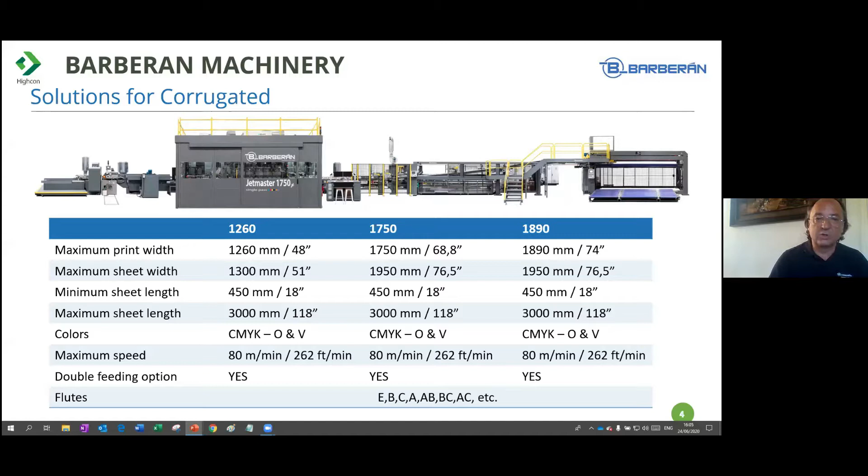Our strengths are based on 5 points, which are the soul of Barberan. One of them is the freedom for the customer to choose the ink supplier. We have 5 or 6, depending on the market, ink suppliers that can supply ink for our machines and can even adapt the ink for your needs.

This is something our good partners are doing, and we are lucky because we count with 5 of them, including 3 of the best-selling and biggest ink companies in the world, which are Toyo, Sakata INX, and Kao Chimigraf.

Also, we have another point, which is the real variable data platform. It's something we created this year. Our machines were capable of printing variable data since 2 years ago, but customers weren't comfortable with this feature. So we created a platform where we create the job and prepare the samples for the customer, so they don't need software engineers or electronic engineers to understand how to create that job.

Another point is the production inspection and correction module. That module is not a toy - it's not just a camera that looks at the image and reports errors to the operator. This module is linked with the GIS5 software, and it corrects by itself the alignment and problems of different tonality between print heads and so on automatically, making it a really useful tool.

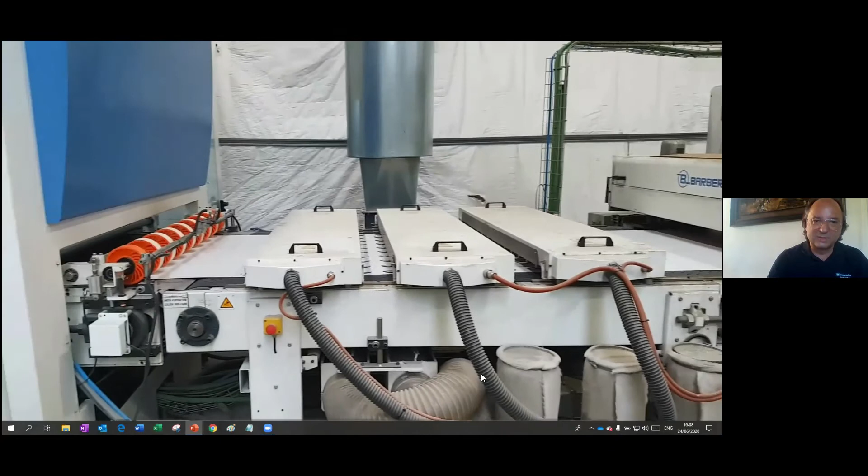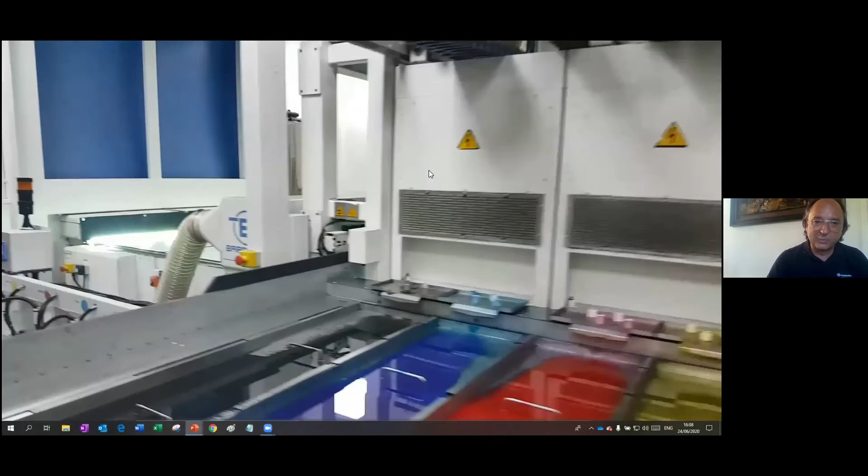So here you can see how we did the samples in the Smurfit Kappa facilities. This is not a new machine - I wanted to show this machine because it's from 2013. It was, I think, the second machine we built. It was done for Smurfit Kappa, it has the color of Smurfit Kappa, not our color, and it's still running like the first day.

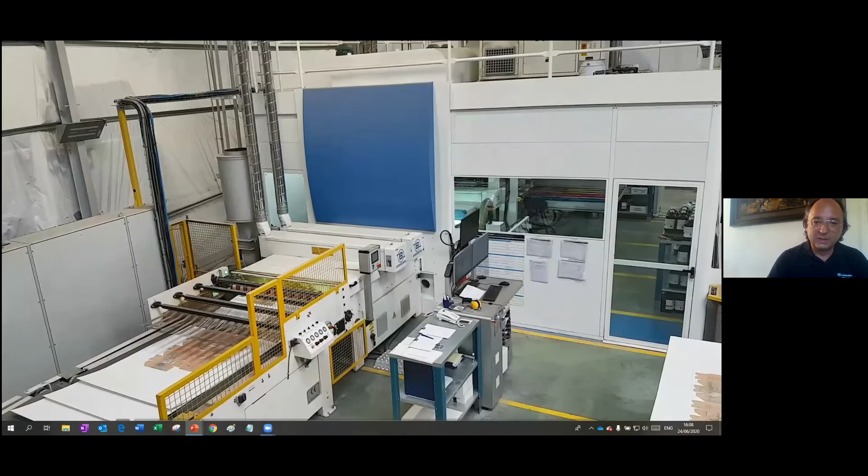We did a maintenance upgrade, I think it was 2 years ago, to keep it updated, and it's still printing like the first day. During the upgrade we had to replace only 30 print heads - from 2013, that's something we have to put on the Guinness record, okay.

So when we received the samples that were delivered to Castelldefels, due to the pandemic we couldn't send them by plane to Czech Republic, so we sent them by truck. It took almost 2 days to arrive from Barcelona to Castelldefels, to Czech Republic, because they had many stops due to the pandemic, isn't it?

So now is your time, Jaron. Okay, here you are.

So we all know today that pre-press is 100% done digitally, and we see that digital printing is rising up rapidly and growing fast every year. At Highcon, we define the finishing area as a place that also needs to move into digital, and this is where we've been standing for more than 10 years.

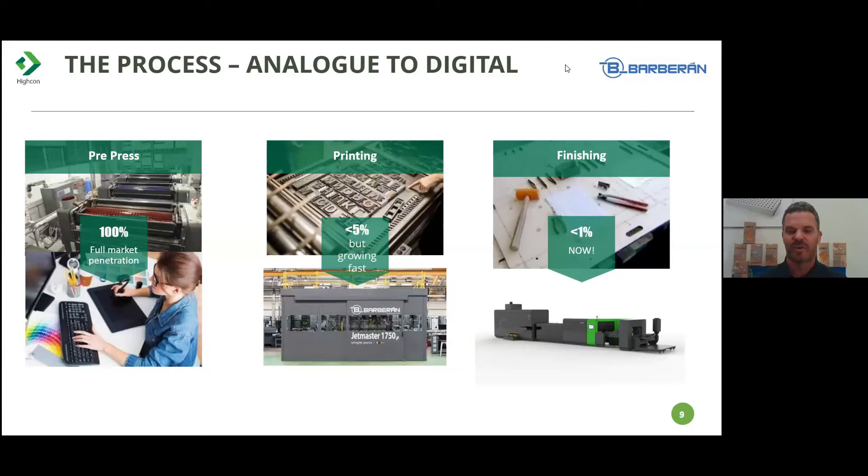Go on, please, Sheila.

So today we have quite a few machines spread all over the globe for commercial printers, folding carton companies, and corrugated companies as well. Some of our customers have multi-sites, and we see 15% of our customers already putting on repeat orders, meaning that people like what we do.

Going into the technology of the platform itself, if we look inside the machine, we pass the sheets landscape through a registration table that takes care of mechanical and optical registration. Then the sheets move into the first station, not like analog machines that have everything in one pass. We do it in a single pass, where we divide the crease lines and cutting lines into two separate areas.

The first one, for creasing, is what we call DART, digital adhesive rule technology. This is where you see the movie on the right side showing how it's actually made on the machine itself. We write the polymer, like a 3D printing paste, and then cure it with a UV lamp.

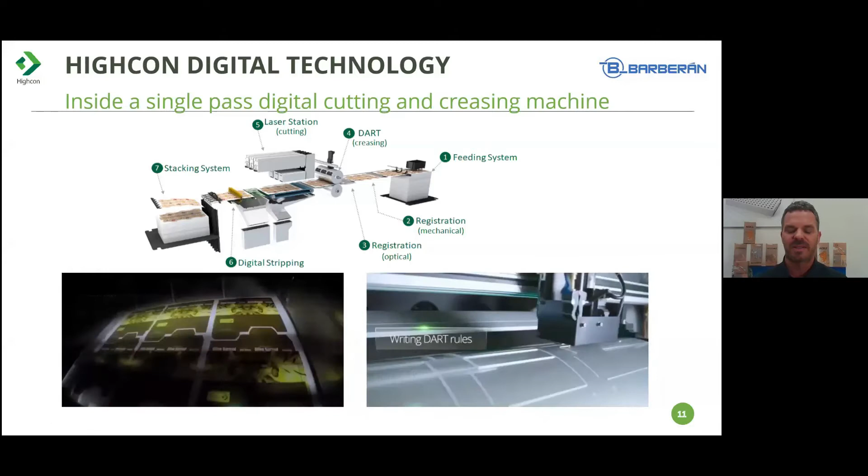Then the sheets pass through the second station, an array of 3 powerful lasers working in parallel with a sophisticated algorithm we created, and continue to station number 6, the integrated stripping unit, which doesn't affect any setup or speed, and of course doesn't cost any additional money for this. So this is the main platform of how our machinery works.

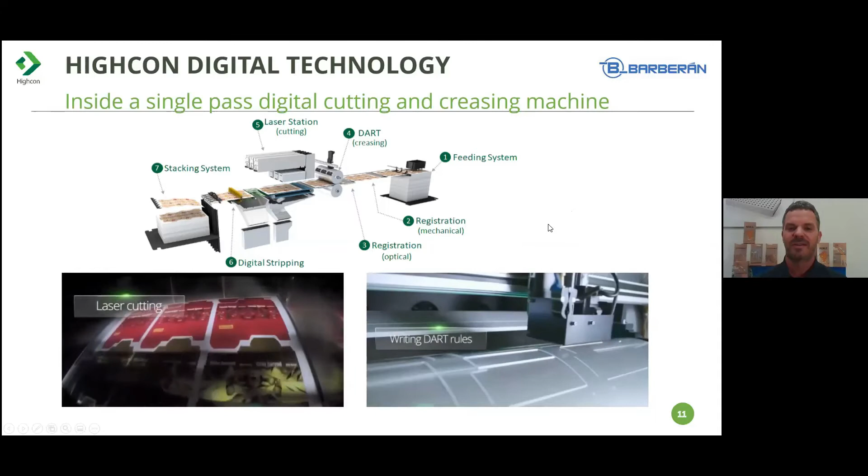For corrugated products, we can offer today 2 machines. The first is the Highcon Euclid 5C, which can run up to 2,250 sheets per hour, supports up to B flute, and is very good for short runs. For companies dealing with web-to-pack, for example, it's very suitable for them.

The other machine is the Highcon Beam 2C, offered in two types: one pallet-based, and the second a non-stop configuration. This machine was supposed to be presented for the first time at Drupa and be the highlight of our show. Drupa was actually supposed to be happening as we speak, but unfortunately we're all sitting at home watching webinars instead. So that's the machine, and of course all available, but at the moment you can just see them remotely.

Sorry, that machine was going to use a bottom feeder, isn't it? Yes, a bottom feeder and a non-stop stacker as well, like what exists in the market. Yes.

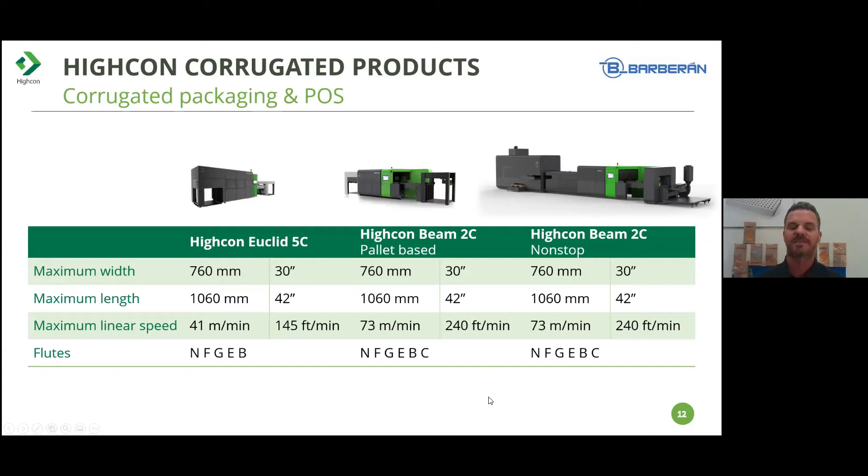Looking at the Highcon benefits, we identified 5 major benefits we want to highlight. First is speed to market, since everything is done in-house. You don't need any additional company to bring your product into your facility. We deal with all the short runs that are becoming more and more common today.

By doing that, we improve the process inside the factory. We can free the analog machines to do what they do best without stopping all the time for short runs. You don't need to wait for dies to come from another place. Another rising segment is online, which we see more and more companies using. It's very good, as I mentioned, for web-to-pack or e-commerce, for example.

And of course, very important to remember sustainability. That's a very important thing that Highcon can provide a lot of benefit for. For example, the BCT, the box compression test. If you see the box on the bottom, we cut many B-flute boards, all the same, but only the two marked ones are cut by the Highcon machine, and all the others were cut conventionally. You can see how they crash and lose their strength. So what we allow you to do is use a thinner substrate while maintaining the structural strength of the board itself.

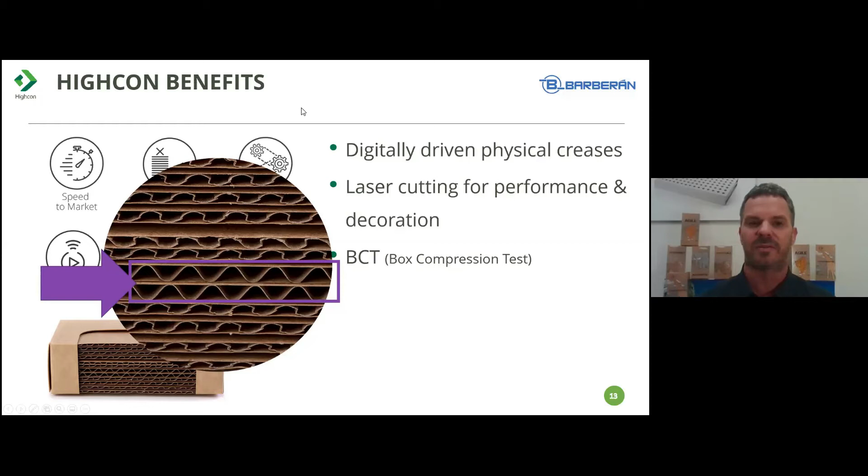And Eladio, I believe in digital printing it's about the same. In digital printing, we have exactly the same result. We've seen that our customers can reduce the quantity of paper due to our technology, which does not crease the board, so we keep the compressive strength completely intact. I have to add something more: it seems the UV inks also help increase the compressive strength of the boxes.

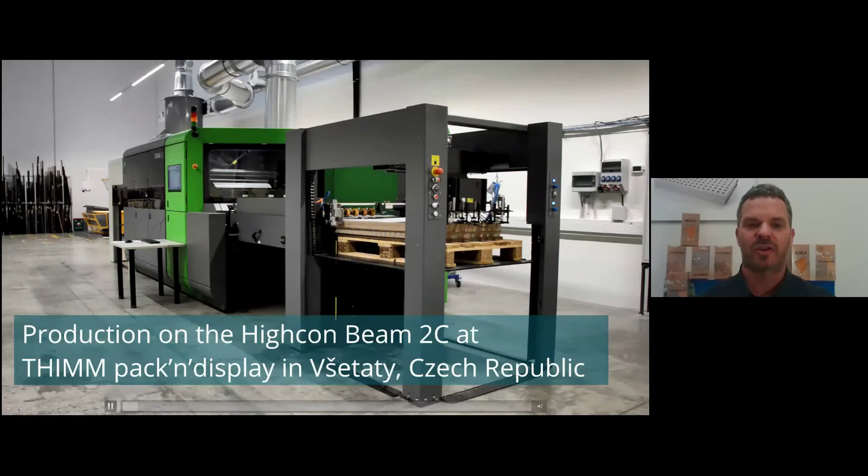Perfect. So now we're going to see those same boxes being produced on the Highcon, right? Yep, exactly. This movie was filmed at THIMM in the Czech Republic, one of our Highcon customers that owns the Beam 2C, the pallet-based platform.

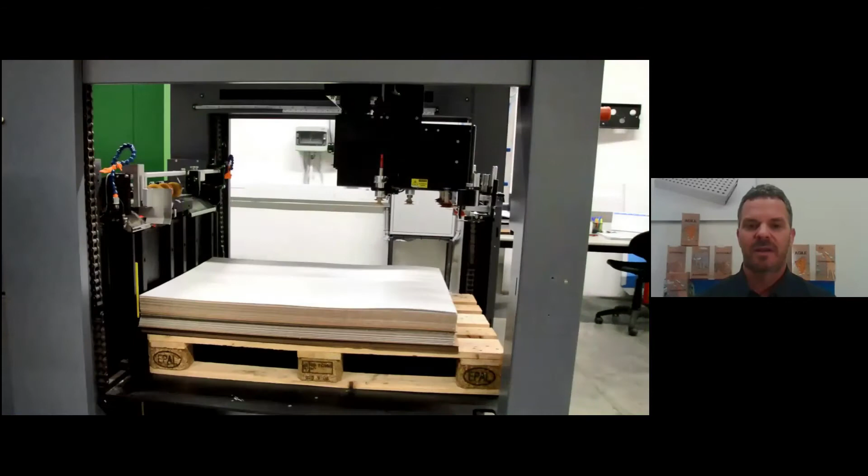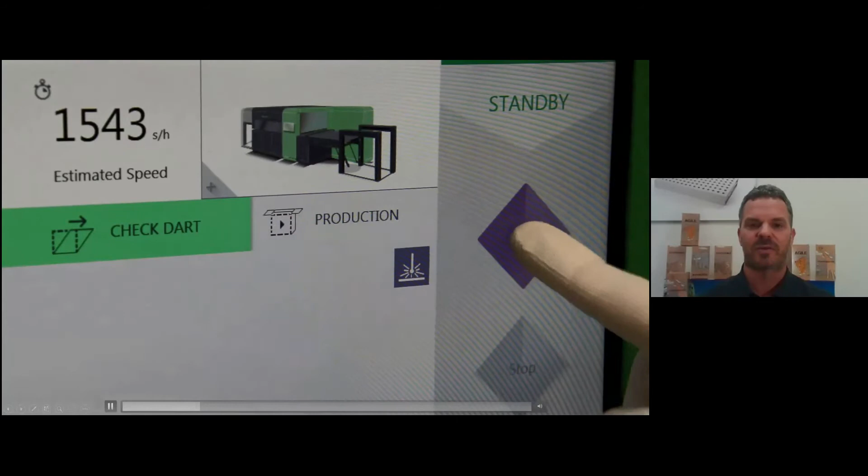So as you see, they will be running the sheets that came from Barberan, from Smurfit Kappa. We run them through the machine. You can see it's running at a bit more than 1,500 sheets per hour in this case, printed side down, like in the conventional industry. This is how we reproduce the sheets for the corrugated market.

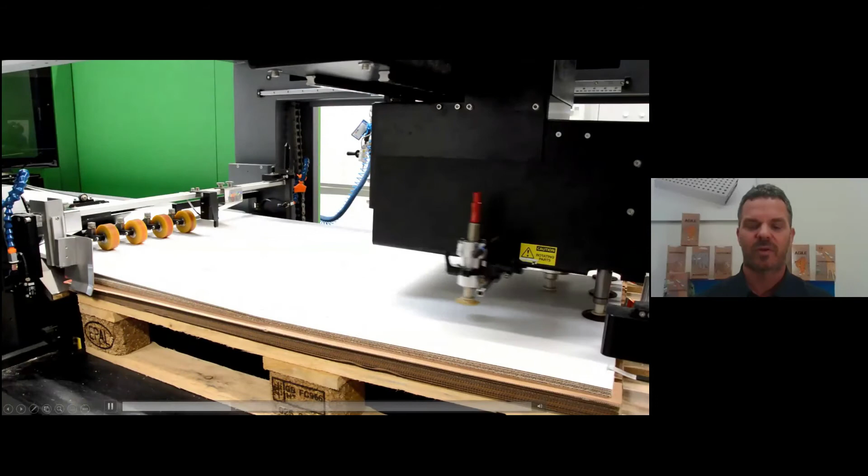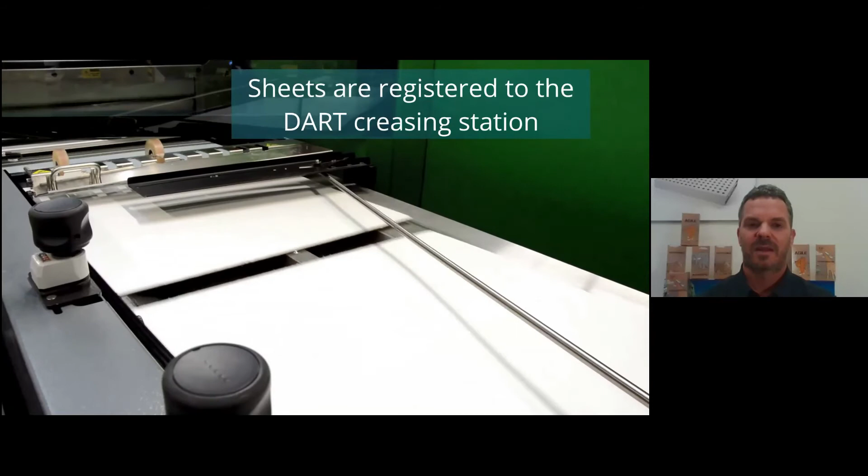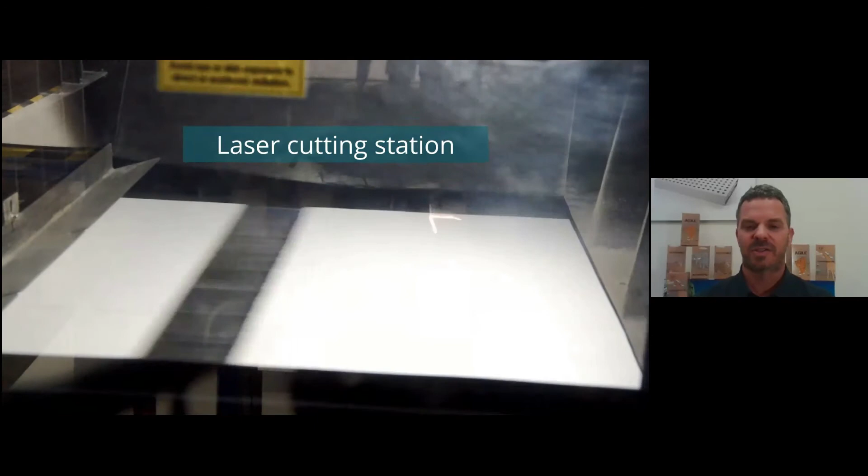Running through the DART station, the creasing station, and going into the cutting chamber where all the very fast cutting is happening, and into the stripping station, which is the last one, when all the small particles are falling apart.

So you don't need an extra tool for the stripping? Yeah, as I mentioned, it's an integrated stripping tool. You don't need to waste any time, and it doesn't affect any speed.

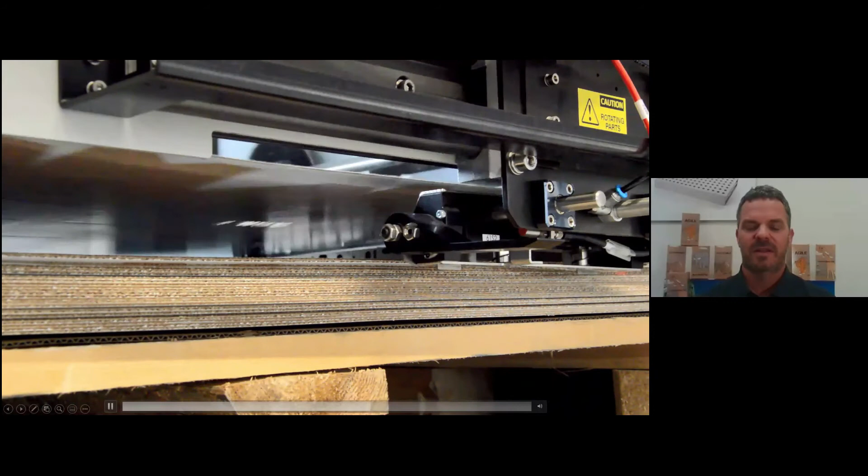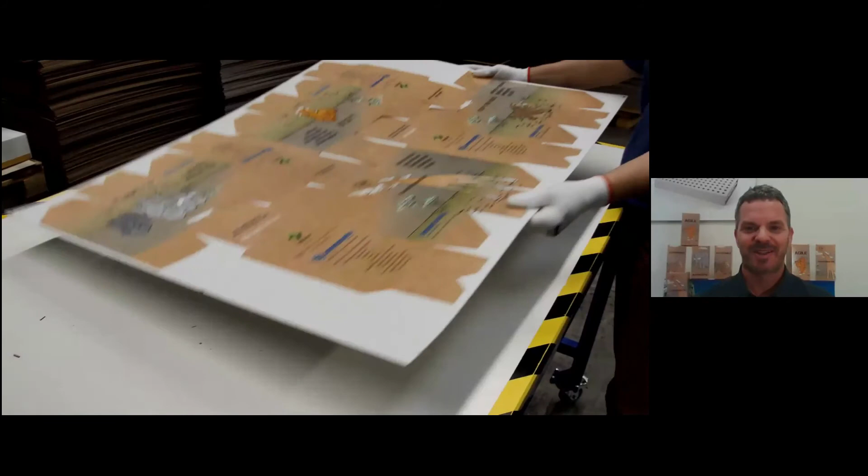And in a few seconds, you'll see the results yourselves. The operator will be taking the sheets out, of course adapted to the situation, covered and secured, with gloves and masks.

So yeah, I see very fast you get your product ready and done, and ready to be shipped. You can see on the back of me a few of the samples ready. And here you go with your products ready.

So why those 4 boxes, Elad? Yeah, the history of these boxes started because, as you know, during this year, 2020, we were going to celebrate the Olympic Games in Tokyo. And the slogan of the Olympic Games is Altius, Citius, Fortius, which means the tallest, the fastest, and the strongest.

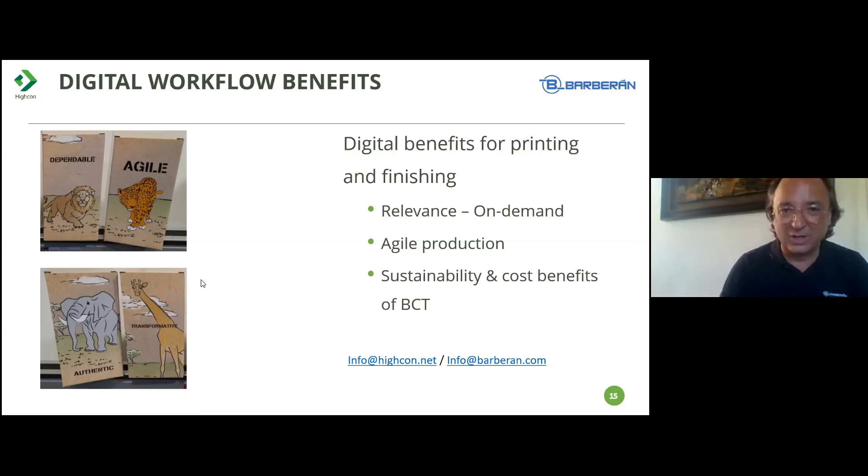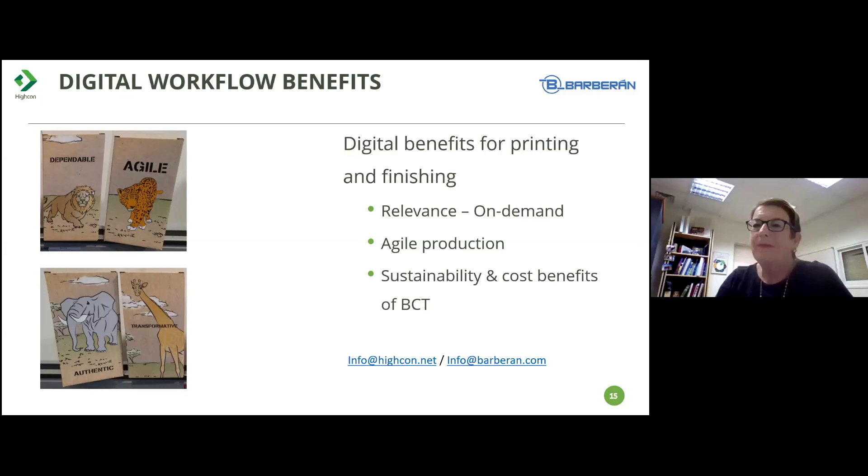I can add to that—I can show you a close-up of the back of the sheet. You see it from the reverse and you don't see any discoloration whatsoever, so we know the quality is very high. Due to the very fast and powerful lasers, we avoid any discoloration or colors that you don't like to have on the boards.